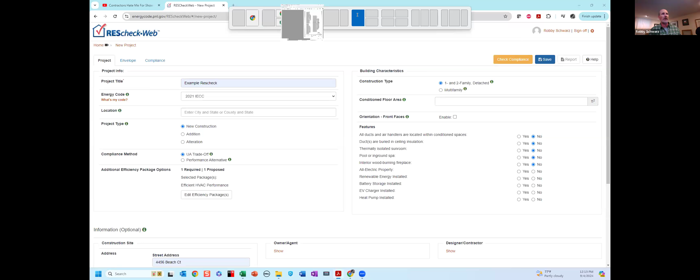So I'm going to bring over the set of plans here. And Erica, maybe you can let me know if I have to reshare my screen to be able to see the set of plans. Nope, we can see it. Okay, perfect.

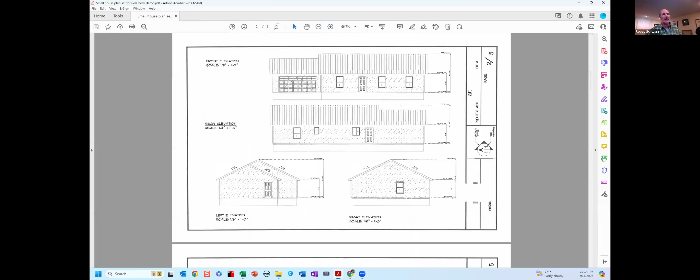So this is a pretty easy set of plans. It's just a ranch style house under a ventilated attic that has an attached garage on it. So we're going to go to page 2 here, and you can get a feel for the house. So our first data input is what is the square footage of the house? I'll blow this up a little bit, and I'm going to ask you guys to calculate the square footage of the house. It's pretty much a square. We don't ever include the garage in the conditioned square footage of the house.

And I should point that out as well, that even if the garage is insulated, the thermal envelope is always considered at the boundary between the conditioned habitable space of the house and the garage. Even if the garage is conditioned, it's never considered habitable. And that's the big distinction point there. So you would never include the garage in the square footage of the house. You would never include the volume of the garage in the volume of the house when you're doing a blower door test as well. The garage would always be separated from the house for that blower door test.

And our boundary is here. This is what we want to be airtight to separate the conditioned space of the house from the space of the garage. So when we calculate our square footage, we're just taking the 32 times 42. So do that calculation if you can pull out your phone calculator or have a calculator next to you. Looks like we got one response already. 1344 square feet. Okay, great. So we come back here, and the first thing we're going to add is 1344 for our square footage. And we'll go back to the plans as we go along here.

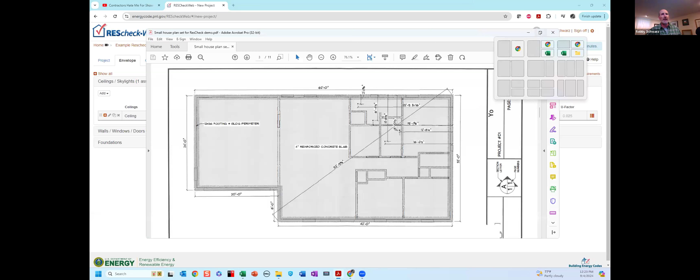But one of the things we need to think about here is that there's a requirement in the IECC, in the specific insulation installation section in the R402 sections of the code, that says you can trade off prescriptively from an R60 to an R49 if the full value of R49 insulation is installed over the top plate. So there's an installation requirement and there's a requirement for the R value. So we're trading off the R value here. We're not going to R49.

We're going to see if R38 will work, but I still have to address that installation requirement, which means that I either have to have a raised heel truss or I need to do a further trade-off and break out the perimeter of that attic that is coming down to the top plate, where I might not have a raised heel truss to receive R38 insulation. So let's say I don't have it, but I have a common 6-inch heel or bird's mouth on my truss system.

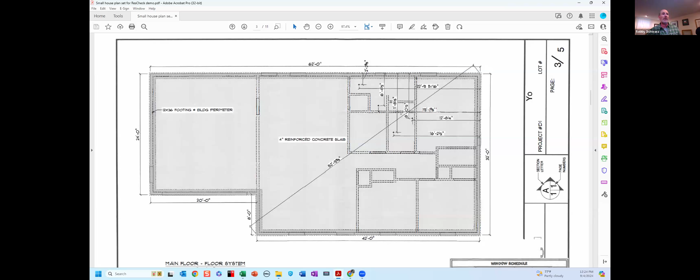So first I need to look and see, do they have any truss drawings here? We can see that they have some truss drawings on my plan set, but that truss drawing is not a raised heel truss. So I need to know what that height is over the top plate and how much insulation I could probably get there. I'm just going to assume that it's about 6 inches. So if we go back over here,

I can add another ceiling entry here, and I'm going to name it ceiling at eave 20%. And I'm going to call it a flat ceiling as well. And my gross area now would be 20% of the 1344, so times 0.2, and I'd get about 269 square feet. Well, we have to decide, should there be some cavity insulation or should it just be continuous insulation? I think we keep it at the cavity insulation of 14.

And then if we go 6 times 4, because remember, R value 4 per inch for the fiberglass, and we have a 6-inch height here. So if I go 6 times 4, that gives me an R value of 24 over the top plate. So if I'm going to put 14 of that R value in the cavity, I need to put 10 of that R value as the continuous insulation over the top plate there. So I'm going to apply that.

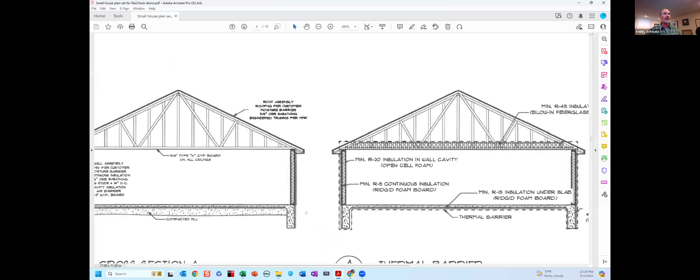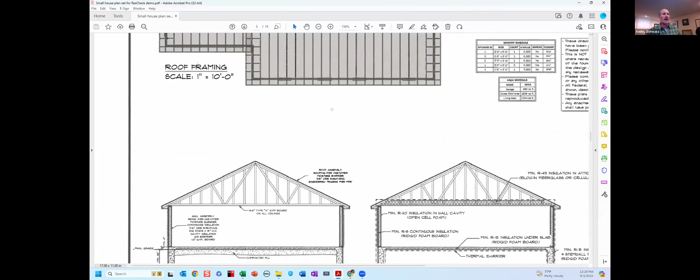So we need to go back to our plan set here, and we're going to go back up to this section, and we're going to need to get the dimension of this common wall between the house and the garage. So it's 24 feet here. And our ceiling height is 8 feet, which we can get from probably our sectional drawings. Let's see if I can find the sectional drawing real quick. Up here. We might be able to get it from our sectional or elevation drawing. So it tells us that we have an 8-foot ceiling here.

So if I take 24 times 8, what do we get? We get 192, right? Orientation, it's front side of the house. Cavity insulation, let's say it's a blown fiberglass, 23. We don't have any continuous insulation. So we're trying to trade off two things here. We're trying to trade off continuous insulation and our attic insulation. And we'll see if we can do that or not. So I can apply that to it. So I have my front of house here.

Let's go back and address the question from Janet here that is basically saying we don't have any continuous insulation. So we're going to make that 0. See if I can make that 0. And we're going to make this 24 just over the top plate there. Okay, so that's how you would do that, Janet. And that's a great catch. Great way to make our model a little bit more accurate here.

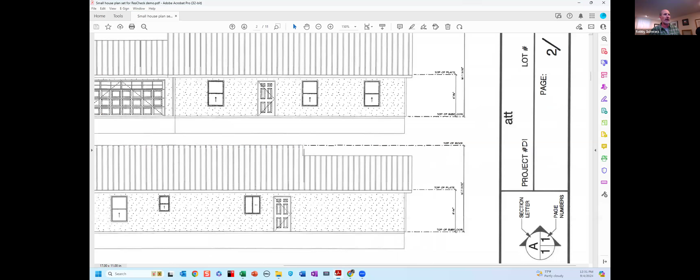Okay, so if I go back to our plans, we'll see here that there is a door between the house and the garage. I don't necessarily have the exact size of that, but I'm going to guess it's pretty common that it's a 3080 door, so it would be 24 square feet. And so I need to enter that door and associate it to this wall here. So let's see if I remember how to do that.

Oh, I add a door. It's pretty straightforward. Door to garage. It'd be a solid door under 50% glazing. And it's 24 square feet, and it's common that the insulated doors between the house and the garage is an R6 door. So you have to convert that to a U value. So we take 1 divided by 6 to get a U value of 0.16 for our U value for that door.

And you can see I have my garage wall, and then underneath it here, I have a door that's associated to that wall. So my total square footage of my wall is 192, and 24 square feet is subtracted out. So I have a little bit less at R23, and then I have the 24 square feet at a U factor of 0.16 there. So I'm going to add in another wall, and it's going to still be a 2x6 wall. In this case, this is wall, let's say, to front of house.

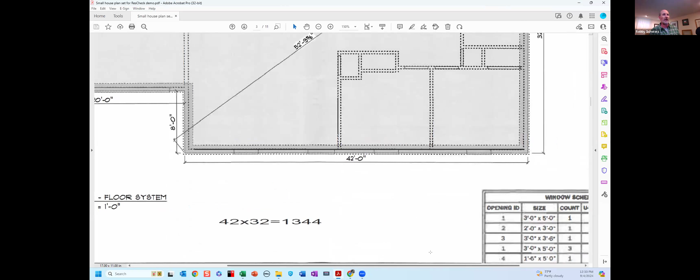And we have to go back to our house here. And we see that the front of the house is 42 feet long. So 42 times 8 is 336. So 336. Orientation is front. Cavity is 23 still, and I'm still saying that we have no insulation there. Which means actually I need to go back in and edit this because this isn't to the front of house. We'll just do unspecified because it doesn't give us the ability to do that. We could do it to the left of the house as well, I guess, there. So maybe I'll do that real quick.

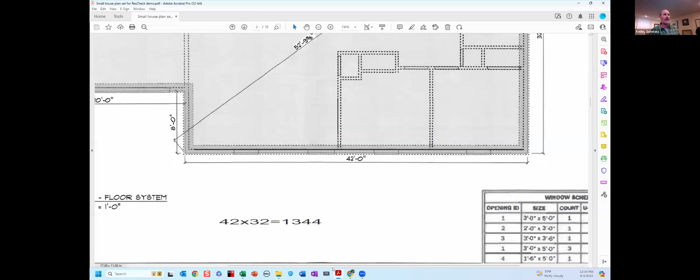Okay, so I'm going to add a door. So we can go in back to our plans. And in this case, we can go over here. And we can see we have a door that's a 3.0 door. We have a window, 1, 2, 3 windows that are 3x5 windows. So that's 15 square feet of window. So we have a total of 45 square feet of window and 24 square feet of door that we need to add to that front wall, in essence.

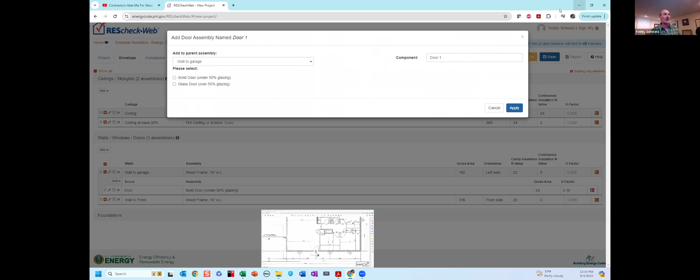So we're starting with the door. We're going to call it a solid door again. It's 24 square feet, and it's still that 0.16, we'll call it. 0.16. That's R6 door. We can call this the front door so that everybody knows that this is the front of the house. We're going to put in the front door there. But why did it associate it to this wall? This wall. We need to move this. I think we can just grab it, if I remember correctly. Maybe I have to do it that way.

Let's see here. Oh, okay. That's what I did. I forgot to change it up here. So I went into the edit function, which is the little pencil there, and then I have to apply it to the right assembly here. So I need to apply it to the front wall, and therefore we have our front door now associated with the front wall here.

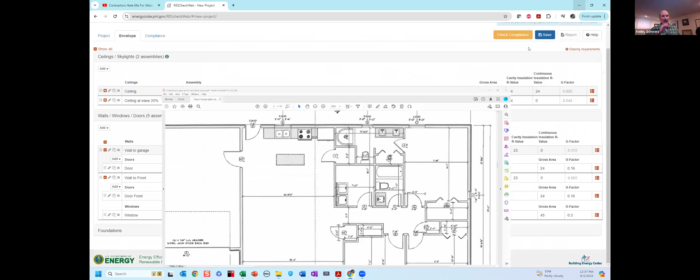So we're going to add another wall. We're going to call it right. It's a 2 by 6, 16 inches on center. It's 32 feet long by 8 feet high, which is 256. It's facing the right side. Cavity insulation is 23 there.

Then I'm going to associate that window to that wall. So I have to put it into the right wall. We're going to call it a vinyl framed window. It's double pane low E. It's 1.5 feet by 3 feet. So it's a 4.5 square foot gross window at a U factor of 0.30, and apply that. And you can see that underneath the right wall, we have that window associated with it.

We need to add our back wall, which is 16 inches on center again. It's the same square footage as the wall to the front. So it's 336 square feet. It's facing the back of the house. And it's at 23 R value again there.

We need to go double check what we have going on here. We have windows that are a 3.5, a 2.3, a 3.36, and another door to the outside there. So we can do our 3.5 times 3, which gives me 10.5 square feet of glass for that window. We have 2 times 3, which is a 6 square foot window, and a 3 times 5, which is a 15 square foot window. So our total glass, if we add all that up, is 31.5 square feet of glass.

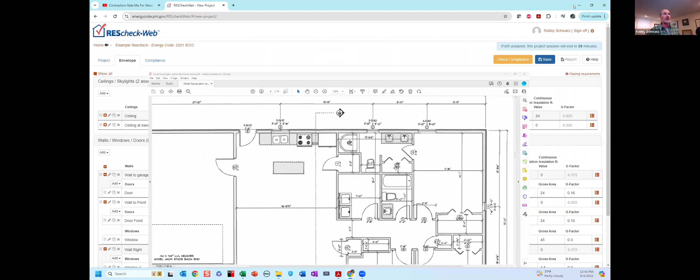And I'm just going to use the same 24 for the door, even though it is a little bit smaller. So you might want to double check that as well. So where's our right wall, front wall, garage wall. Maybe I didn't add it. I thought I added it already. Anyway, so we're going to add that wall. We're going to call it to the back of the house. Cavities 23. Apply it. Oh, we didn't do our square footage.

Front, right. Oh, here it is here. Okay. Okay, so we have our wall. Now we need to apply the windows to that wall. So again, we have a vinyl frame. We're going to apply it to the back wall. We have a double pane low E window. We calculated the total square foot at 31.5 and a U factor of 0.30 again.

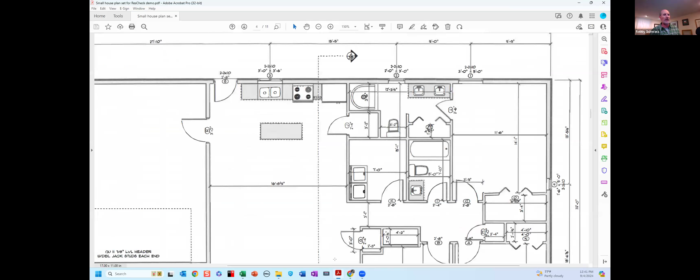And we have a door that we need to apply to that wall as well, which is on the back wall. We'll say it's the same as what we had before, just for ease here. Okay, so the only thing that I need to add now is this little section of wall that's not adjacent to the garage because of the way I broke it out. And we see that's 8 foot, so it's an 8x8 wall, and there's no window or door associated with it.

So I have one more entry here, which is a wall. It's 2x6, 16-inch on center again. It's facing the right, so we need to specify its orientation. And it's an 8x8 wall, which is 8 times 8 is 64. And it's also insulated to 23. Okay, so I have my ceiling entries here. I have my wall and window and door entries here. The last thing I need to enter is my foundations here.

It looks like we have a question. So general question, is it better practice to combine the windows and doors per wall or list them separately? The calculation would be the same. If you combined all the wall together, then you could subtract out all the window from that wall. You have to associate a window to a wall. I like to go around front, right, back, left, around the house, so I make sure that I don't forget anything. But it's really up to you.

I also think that if you as a jurisdiction got the RESCheck that we're doing together, it's easier for you to read and to review because you see each of the components broken out in such a way, and they've been labeled. So you know it's the front wall or the wall to the garage. You know that there's a door. Yep, he took that into account. On the front, there's a front door and there's windows, and you basically have an idea that you've taken everything into account. But yes, you are right that you could do it either way. You could add them all up as a gross and then take it out of it.

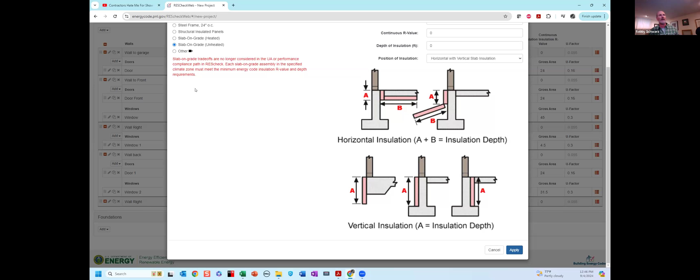If you're using RESCheck to calculate the area weighted trade-off approach, they will not allow you to trade off slab edge insulation for something else, because heat loss through a slab to the earth uses what's called an F factor rather than a U factor, and it's calculated differently. Interestingly, in the 2024 IECC, they've solved that issue. They've added F factors into what used to be called the U value table and the R value table, so that you can trade them off again.

But from PNNL's, or Pacific Northwest Labs', perspective, you are not allowed to trade off insulation at your slab. You're required to enter it. And also in the 2021, in our climate zone 5, you used to have to come down from the top of the foundation, where the foundation meets the wood framing, down 4 feet or down 2 feet, or down a foot and out 2 feet. Now you have to go down a total of 4 feet, and that can be horizontally or vertically.

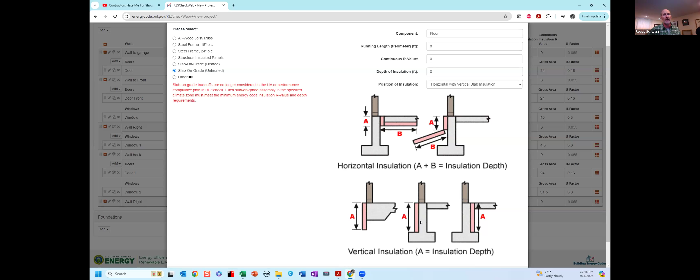So let's use this example over here. They're going down 1 foot and over 3 feet to get the total of 4 feet of below grade insulation. You can go down and out. You can go down and in. You can just go down if you have a 4-foot stem wall. But in essence, you have to insulate from the sill plate down to the footing if you're going just vertically. If you're going to go horizontally, you can make those choices here.

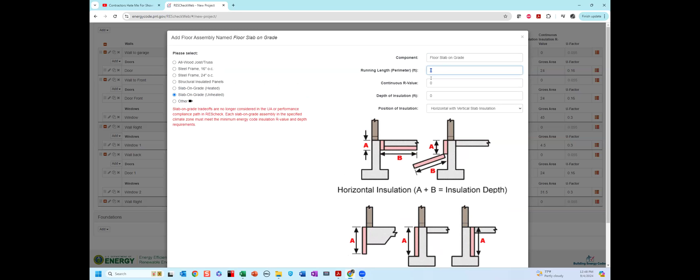Okay, so this floor, I'm going to name it slab on grade so that everybody knows it's not a cantilever or a floor over garage or anything like that. The perimeter. And Robbie, is the 4 feet specific to 2018 or just 2021? It's specific to the 2021, that change there. Thank you.

So our perimeter length of the slab: remember, the front of the house was 42 and the side was 32. So we add up 42 plus 42 plus 32 plus 32, and we get the total perimeter of our house at 148. It's required to be insulated to R10 for slab, and it's required to be 4 feet. And we're going to call it vertical insulation instead of our other options.

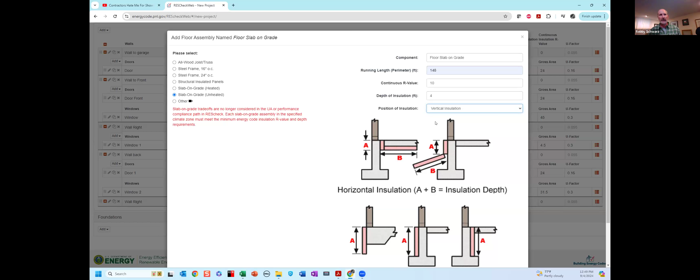If we fully insulated underneath the slab, this is where you get into a heated slab scenario. If you're insulating underneath the slab in its entirety, you still have to insulate the slab edge, but you can also insulate underneath the slab if you had a heated floor. Okay, so I apply that and I have my foundation. There we go. I also want to always make sure that I saved everything. And at this point, I could go in and check for compliance.

And I go over here and I look, oh no, I am not compliant. I am 2.3% worse than the code here, which means that I could either go in and adjust my attic insulation. Maybe I could get R49 attic insulation there, or I could adjust my continuous insulation, or maybe I install better windows than that 0.30 window. Maybe I've always chosen to use a 0.25 window instead of a 0.30 window there.

So let's do a quick poll in the chat there. Do you want to change the windows? Do you want to change the attic insulation, or do you want to change continuous insulation? Windows, attic insulation, windows. Okay, it looks like we're getting mostly windows. And I'd say it's not the most cost-effective way to build the house, but if you really want to trade off attic insulation and continuous insulation, windows is the easiest way to do that there.

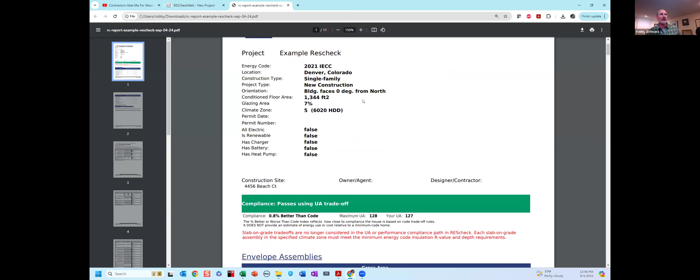So we don't have tons of time here, but I want to make sure you're aware of the report. So we have the report here. You want to double check that they're doing it to the right code. They've described the building correctly. And then this is where you're going to determine if the house passes or not. So my house is at 127 area weighted U value versus 128. So it is 0.8% better. All it has to be is equal to or better than what we call the reference home.

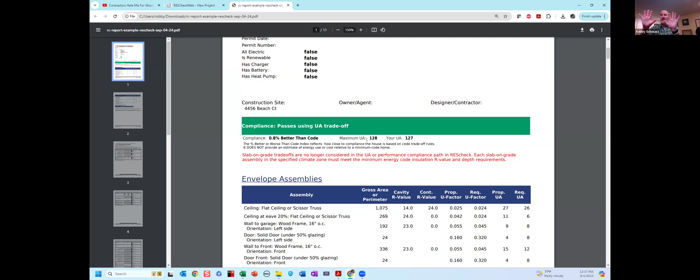And the reference home is defined here as the maximum area weighted U value that's allowed, because the reference home, when I do that modeling and we create those two houses that are geometric twins, the U value table is overlaid in the reference home, and the builder's house is what we just created. This house is equal to or better. In this case, it's 0.8% better.

You should go in and double check that they got the square footages correct and that they are modeling the R values correctly. So let's say I forgot to take this truss square footage out of here. I would have too much attic area there. So you want to just do a basic check to double check that, and double check the R values and U values that they make sense.

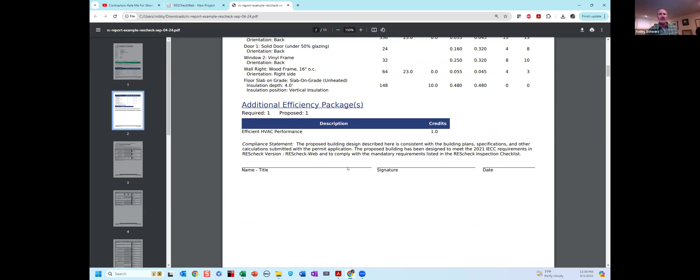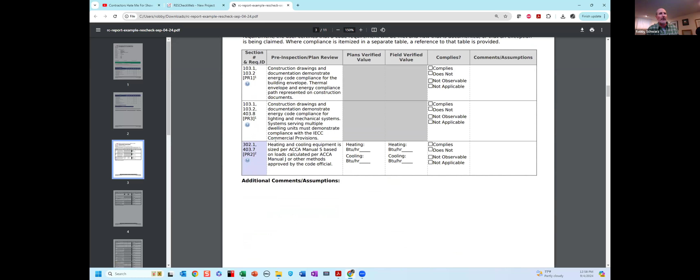These things should be signed by whoever did it. Remember, a registered design professional doesn't have to do this. An approved third party, or even a builder, could do it themselves. Or sometimes you'll see HVAC contractors, energy raters, or insulators do this document. And then you have a code inspection checklist that can help you look at other requirements of the code there, that gets printed out by pretty much all the softwares, but REScheck has this one that looks like this.

And you could go into the REScheck software. Where do I go? The last thing I wanted to show you. Oh, go back into projects, I think. There is a place to go through. I'm not remembering where it is here. Here it is. So I can go through these for the envelope and for systems in the house, and I can check off if these things are in the house.

So some of these things were added before on the entry page, but on the systems page, you can go through these as well, and that can help the code official understand if that feature is actually in the house and they should inspect it or not. So just always remember to save your work, and then you can demonstrate compliance. You can print the reports. You can go back to the home page and you could share this with somebody.